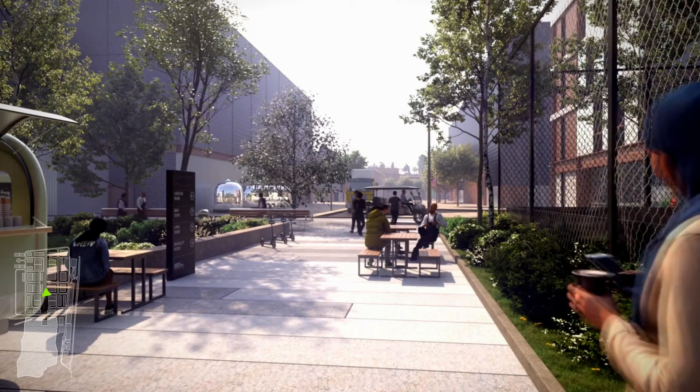My name's Rob Thompson, and I'm really looking forward to the next hour and hearing all about urban design and the film and television industry. And I think there's a couple of things that are really interesting, and I know that Bruce and Lucy will touch on this, but there's such a long legacy in the UK for the film and TV industry, with Ealing, and here am I showing my age, but Ealing and Nettlefold and Shepperton and Pinewood and all the rest of it, and it's so fantastic to see a new film studios being developed, so that's really thrilling.

And I think the other thing is that part of the whole thing about film and TV is it's such a visual and creative industry, and it seems really perverse in a way that they're housed in such drab locations. All the magic happens inside a shed, and it's like being stuck on an industrial estate.

Although I suspect they have better catering than a Rumble Tums van that runs around and beeps its horn at 12 o'clock, so everyone has to madly run out and get what's left of the sandwiches and the coffee.

So it's really thrilling to hear about how they're developing something in a new way, kind of like, well, why hasn't this been done before? So I'm really looking forward to the next hour, and I'm really delighted to have Bruce Calton and Lucy Fineberg from Scott Brownrigg here, who will do a much better job of introducing themselves in a little bit more detail.

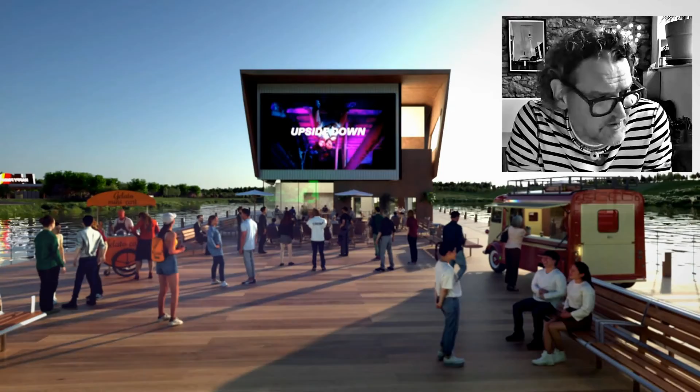Today we'll talk about a new breed of campus film studios and the approach that we have taken on a very unique, interesting and fun site. So today I'll introduce Lucy Fineberg, my senior urban designer, and myself, Bruce Calton, head of master planning at Scott Brownrigg, and we're going to give you a little bit of insight into the film and television industry and what it does across the globe, a little bit of history in the UK

in terms of where film came from and where it has generally been based in the UK, a bit of history about the site and how we trace through research the history of a site and what has happened in the past to what it informs in the future, and then show you how we've applied our research department work into analysing film studios to see how we've adapted it to the site.

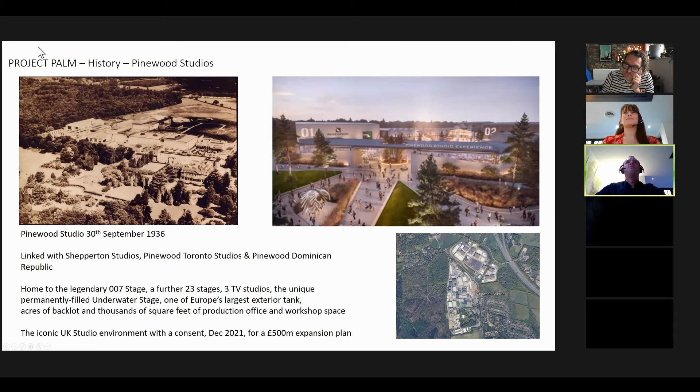And at Christmas last year, it received consent for a £500 million expansion, showing that the film and TV industry is a growth sector at the moment, and that's really because America is losing a little bit of its revenue, and it's going predominantly both to Canada and the UK, where stars are wanting to come across to Britain and be part of filming in the UK.

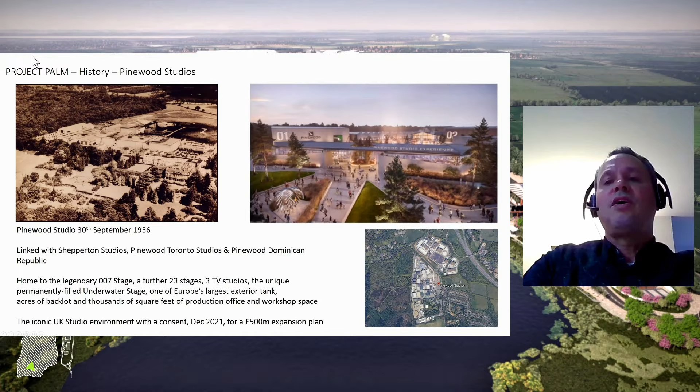Our discussion today is about how you go about master planning these. And in the bottom right-hand corner, you can see that Pinewood Studios grew from a series of sporadic shed studios, workshops placed relatively in a functional way that was just about growth, adding on a studio because they needed the space. Whereas we're hopefully today showing how to take that apart and re-look at how to design a new studio.

Elstree is a different type of product. It is a very urban or suburban location split over a series of sites. It requires a duplication of security, access, movement, parking, staff facilities, even though it's superbly successful, dating back to 1926. It is split by its location in a suburban West London location.

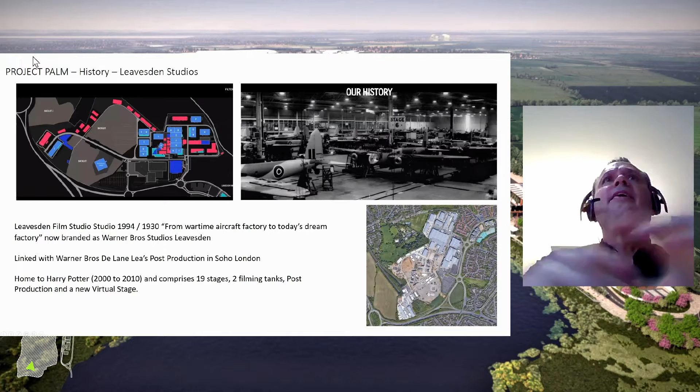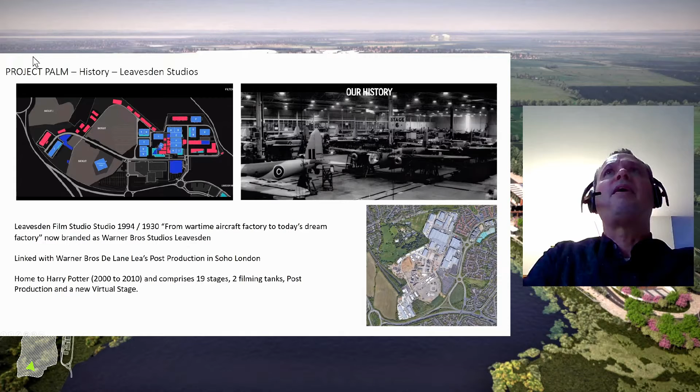And so places like Leavesden Studios up in Watford, originally a fantastic wartime aircraft factory, repurposed, as they say, to today's dream factory, taken over by Warner Brothers. It has a sister connection in Soho, London, for post-production units. And most people will know this particular film studio as the home of Harry Potter from 2000 to 2010, and it has some major stages built for visitor experience. Again, something interesting to think about when designing new film studios.

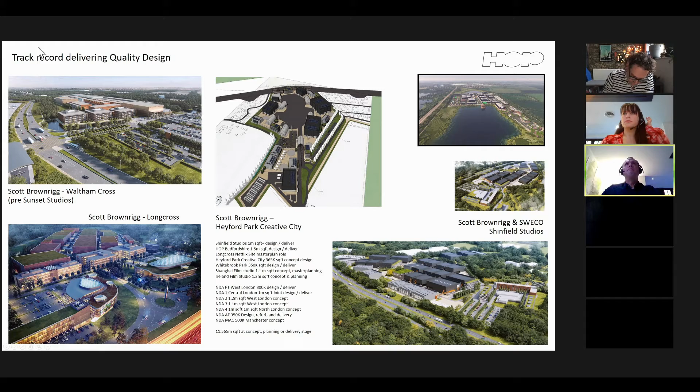There are many NDAs in place which are about other film studios coming forward, being designed, and that's really where we, Scott Brownrigg, have enjoyed the past 2 or 3 years, where we have captured part of this sector boom and buoyancy. We need in the UK to build 2.3 million square feet of stages in the next 3 to 5 years. That is what the agents in the industry have assessed is the capacity that we need to capture. So the moment is absolutely perfect to be looking at sites, bringing them forward.

And we've been lucky enough to work pre the Sunset Studios planning permission up in Waltham Cross, a fantastic site on the north part of the M25. We're currently working still on Longcross on the M3, where Netflix have a large facility, and we get called in to look at creative cities such as the American Air Force Base in Upper Heyford, just north of Oxford, to create a new creative city of film and media.

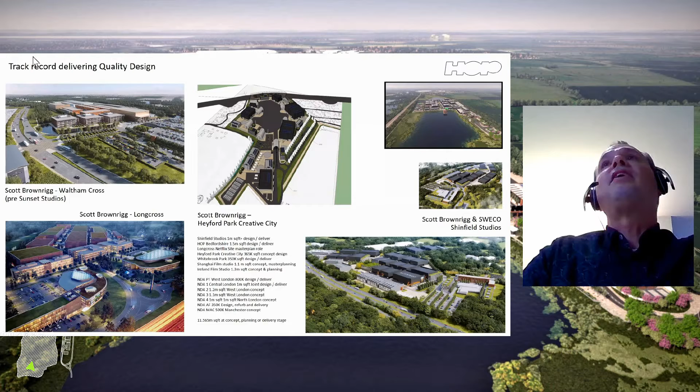We're delivering Shinfield on the M4 on land owned by the University of Reading, and that's interesting because the university have changed their course to give the industry graduates who can just come from the university into this facility, which is about 1 million square feet. And today we'll talk about HOP Bedford. So where do we start?

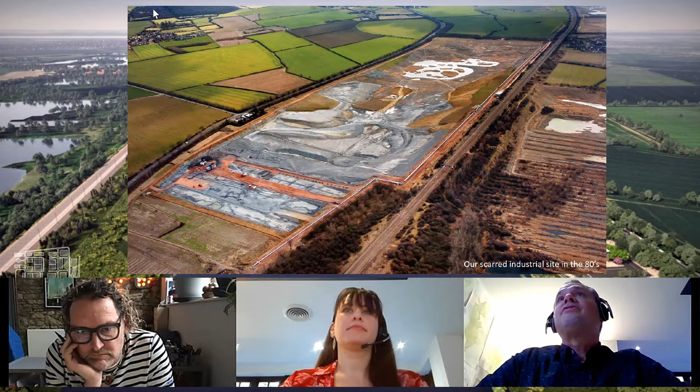Now, when we first went to site, this was the first photograph that we were presented with, which is a remarkable flat site just outside to the southwest of Bedford town. It's part of the past industry that scarred a lot of the landscape in the area, because London clay was found, and our site is a former clay pit that extends 20 meters down into the ground across this whole site. And what's interesting for us, Lucy and I and our master planning team, is to unravel history and understand how the sites came to be and what preceded our design input.

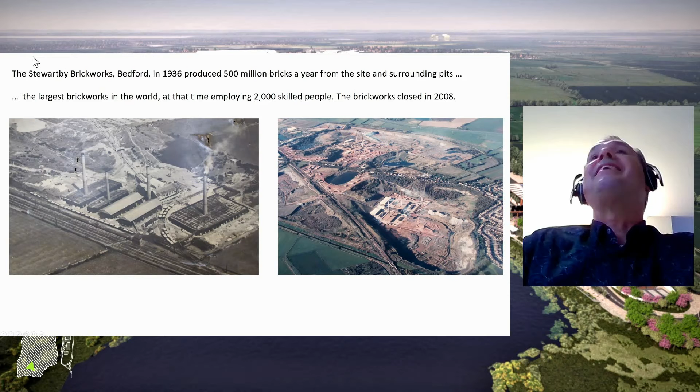And this was part of the Stewartby Brickworks in Bedford. In 1936, it was the largest brickworks in the world, producing over 500 million bricks a year from the site, the clay and the surrounding area, the clay pits, coming to a brickworks that Stewartby built and employed 2,000 skilled people at that time.

Today, it is a 143-acre contained site that has been filled with rainwater. It's not served by any river courses, and over the past 10-15 years, it's slowly filled up to about 6 meters deep of water, and reeds have grown in the surrounding areas, but the land sits 12 to 14 meters deep below the surrounding agricultural and residential communities that are coming forward.

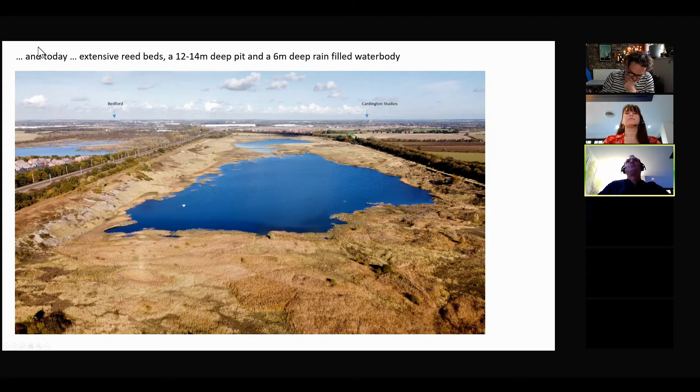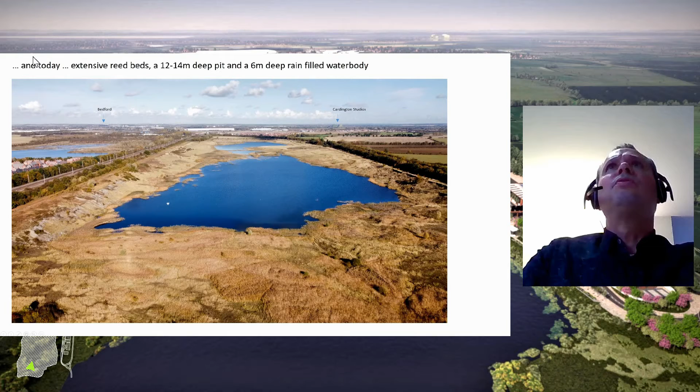You can see Bedford in the far left of the image, and interestingly, 1.5 miles away to the right, Cardington Studios, a former World War II blimp aircraft hangar. 2 hangars there have been converted to film and TV. And as we've got into the project, it's emerged there is a real population dedicated to serving the film and TV industry within Bedford themselves. And they've produced some remarkable global films you wouldn't know had come from the Bedford environment.

So before we unravel the onion skin of history around the site, this helps to illustrate how the site in the middle of the screen in red sits within Bedford's growth strategy. It's a southwest linear corridor following the railway lines, where Bedford have seen to develop a large amount of residential districts. Right next to our site, we have Wixams, which is coming forward in their latter phases, delivering 4,500 homes. Mill View, that sits right on the edge of our site, has just been submitted for planning with a country park

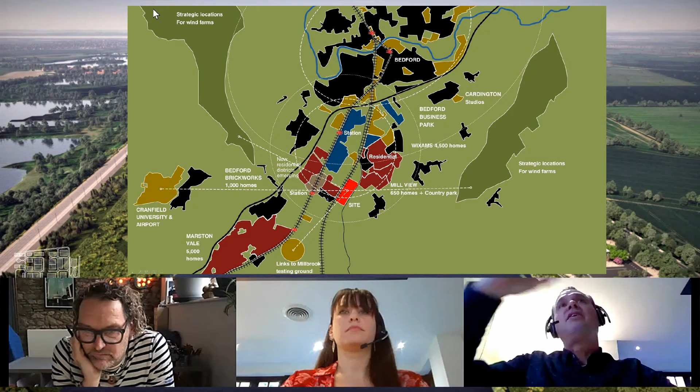and 650 homes. Within Stewartby itself, they've seen remarkable expansion of 1,000 homes in the village, and then the brickwork site will come forward as a further 1,000 homes, and Marston Vale, bookended by Millbrook Testing Ground and Cranfield University, is a further 5,000 homes. So we're lucky we're putting a high-skilled employment zone right in the middle of extensive new and existing residential, which supports our sustainable approach to connecting to these communities, connecting to the wider employment corridors to serve this particular site. So I'll pass over to Lucy to take us through our unravelling of history.

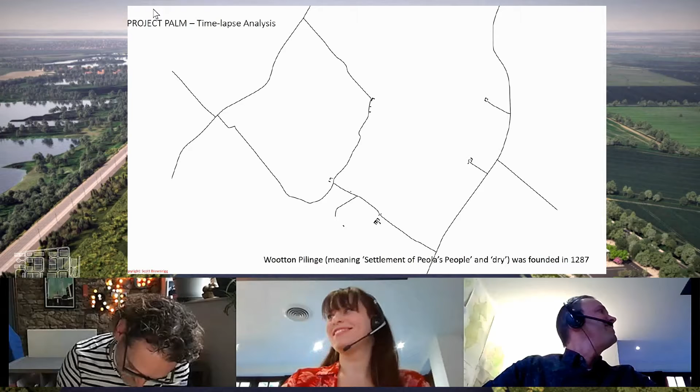Thank you. As Bruce has so well put, the way the site has developed, how much it has changed, that extends to the local village and how that has developed and is continuing to develop. The site was originally founded as Wootton Pilinge, which literally means Peola's people, and was founded in 1287. And then until 1846, it was a small hamlet of farms and cottages. And in that year, a railway was introduced, which dissected the village and basically increased the area's economic sphere of influence, and was the trigger for change. Following this, the Midland Railway Company built a second railway to the east of the village.

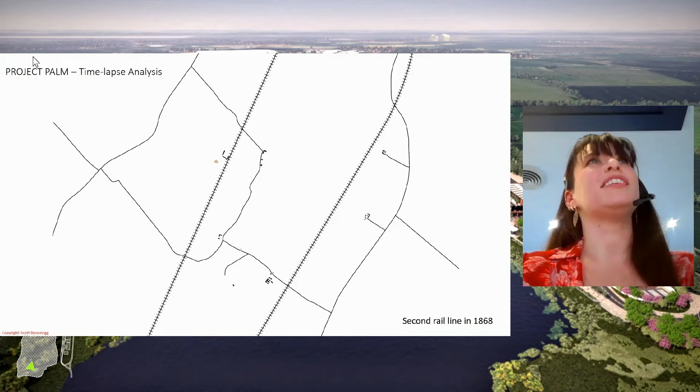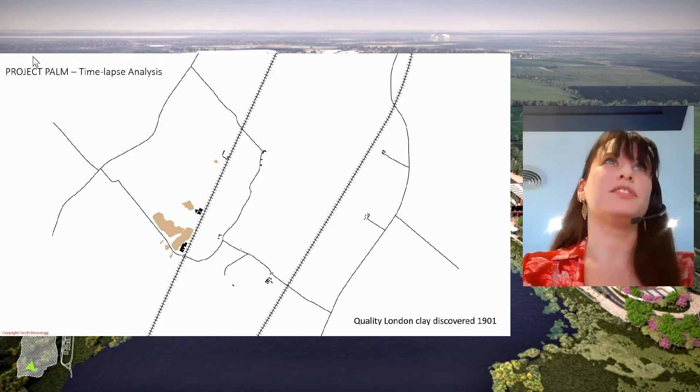And as Bruce has already explained about the clay extraction, at the end of the 19th century, the flat plains of Wootton Pilinge were identified as one of the largest Oxford clay exposures in the country. And this clay was used to produce Fletton bricks. And in 1897, brick revolution and a large increase in brick production took place, and massive changes in construction. In 1901, the Wootton Pilinge Brick Company was founded. And following this, in 1920, the London Brick Company and Wootton Pilinge Brick Company merged. Again, following this, a lot of change happened very, very quickly.

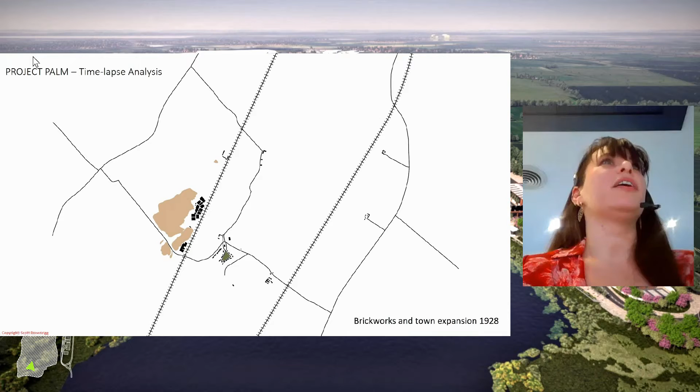In 1926, the Garden Village proposals for the village were submitted by the architect F.W.W. Walker. The village is renamed Stewartby after Sir Halley Stewart, who was the owner of Wootton Pilinge Brick Company. So it's very interesting how even the place is rooted in what is happening there. Churchill Close completed, and a memorial for the villagers who lost their lives in the First World War was built in 1928 to 29.

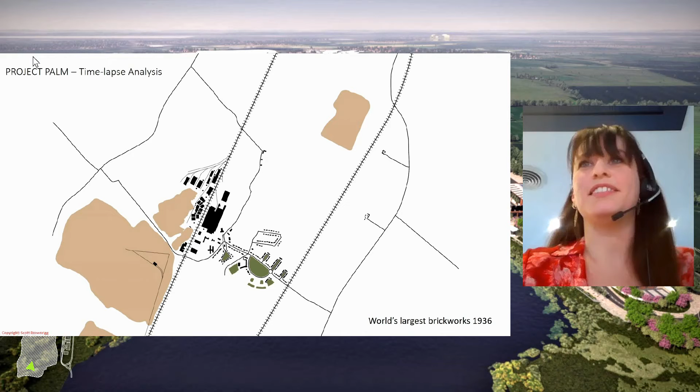Further development within the village was completed, and by 1936, as Bruce had already said, it was the largest brickworks in the world, employing 2,000 people and producing 500 million bricks per year, which is just an unprecedented scale for that time. And following this, as you can see in the imagery, more and more clay pits are opening up as the demand and the supply is increasing. But with this, in 1955, the Sir Malcolm Trust homes were built to house the retired brick workers.

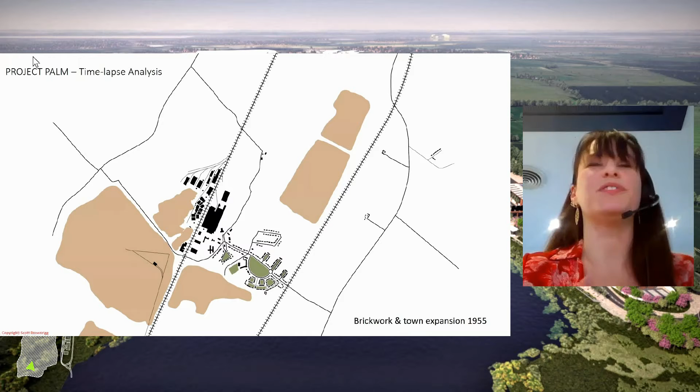In 1964, they built a school, so they're developing the village constantly. And in 1970, the Pilinge clay pit is transformed into a water body. So they stop extracting the clay, and it's now part of the Marston Vale Country Park. So it's going through a process of progression into different conditions.

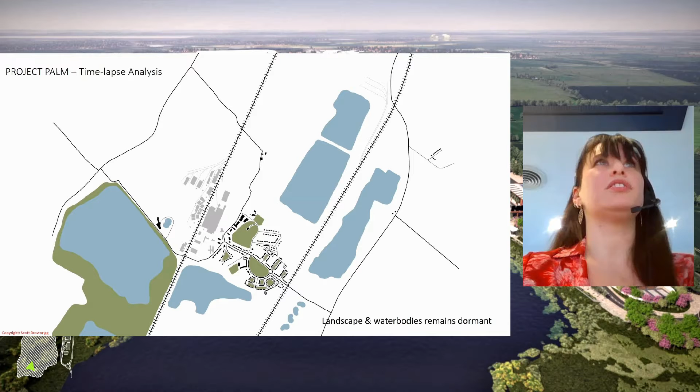Further development, so the Meadows housing estate and industry on Broadmead Road are built, and in 2008 the brickworks closed due to being unable to lower the sulfur dioxide emissions. And what we see is clay extraction pits have turned into lakes, and now we start to see further development, residential development, start to be developed.

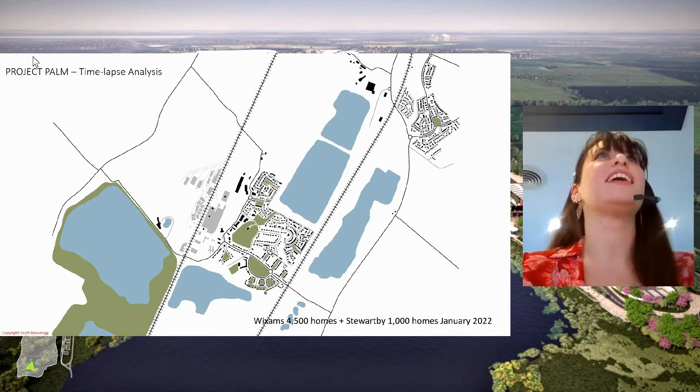And the latest is what we are starting to implement, which is the film and television studio campus. And what's interesting is how the scale, the nature, the industry is relating to that original Stewartby character, and it forms that cornerstone for the surrounding developments and skilled employment for future residents of the local area.

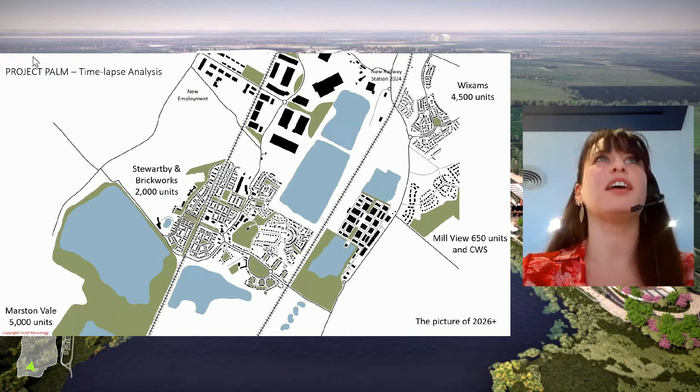Excellent, well done. And I think it's really interesting, the philanthropic approach that Stewart did in terms of looking after his workforce, looking after them once they'd retired. He built the churches, the stores, the schools, the senior living enclave within Stewartby itself. It's really nice, and when you drive through it, it has that.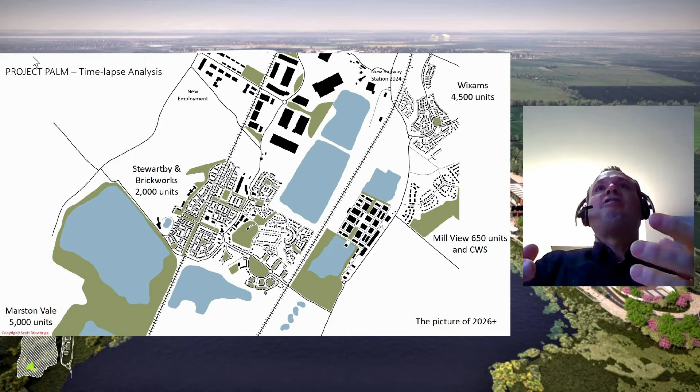It's not quite Bournville up in Birmingham, but it's got that feeling that somebody looked after the brick, and it is of its geology, because the brick that came out of the ground is what they built the whole of the village with. So it's really fascinating unraveling that history and looking forward. So that was then, and here is the future. So I'm going to start with a very busy page now.

When our client, who is Verb, part of the Yondr Group, and Quartermaster Entertainment Industries, who are the operators of the film studio, approached us, rather than just diving in and drawing and thinking that we could design a film studio from scratch, we stopped and we looked at all of the existing film studios that had been built and all of the current contemporary studios that are going through the planning applications and with planning permissions, to try to decipher what are the core ingredients that make, if you had a clean sheet of paper, a highly functional film studio with all of the supporting infrastructure that you would need.

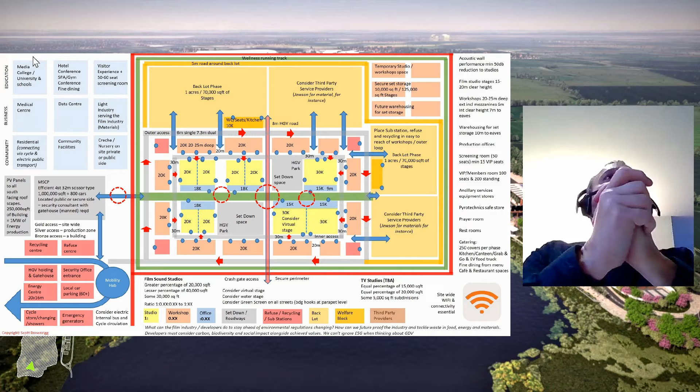So if you're building in the middle of a desert, what would you provide so that you could operate this particular sector? And what we did was the research team looked at all of the information and collated a document. This is a page from the document of what the core ingredients of film studios should rely on. Up in the top left, it's the ideal mix and link to support infrastructure.

Within 10 minutes of going live on our emails, the University of Bedfordshire contacted Quartermaster to say that they really were delighted to hear a film studio was occurring within Bedford itself. It means that the students leaving the university don't travel to London to go to Pinewood or into central London film studios. They have a facility that they can come to and work at on their doorstep. So the links, film studios with links with colleges and universities, and now at schools as well, is vital.

What we find is missing in some of the studios is hotel or accommodation for staff. A lot of the poor press that you read about film studios is workshops where staff work very, very long hours and perhaps leave late at night or early morning, very tired. Accidents are happening. So our client has taken the view that we provide accommodation on site for people that, should they wish to stay, they can do, because the health and well-being aspects of this film studio have been ingrained in the design from day one.

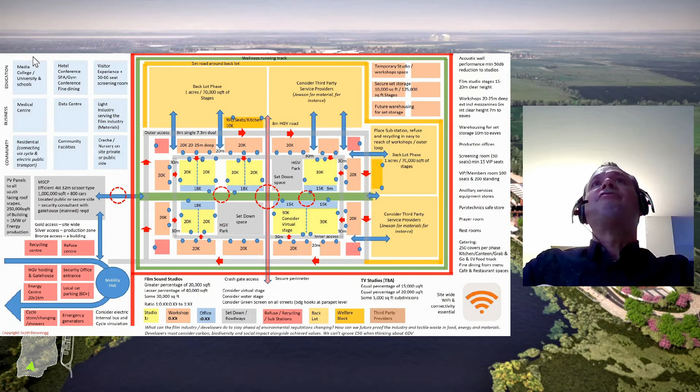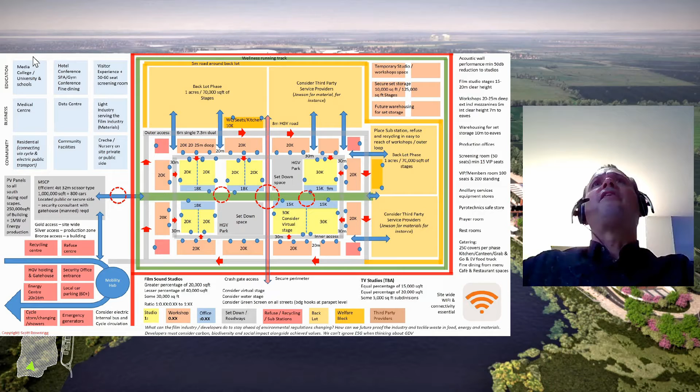We wanted to do things differently from the more ad hoc older film studios and provide facilities that you don't find universally elsewhere. We also have to think about the visitors and the local community. We have to say we have been really surprised and really delighted that we've had 89% positive public consultation support, writing to the council or writing onto the website saying that they're delighted to see this high-skilled employment space occur within such a large area of residential. Mostly they were citing there's nothing much else to do, so this was something of real interest that the community could engage with.

So we've looked at including visitor experience within the site, and within the businesses there are lots of support facilities that actually get built to support the economy and the function of a film studio. Medical centres, data centres, light industry serving the film industry, providing materials and support will happen in the surrounding areas. And the community themselves, how do we connect with them? Can we provide things that enhance their life?

We're providing a new electric bus service connecting the 4 railway stations together through our site, so that it's sustainable, electric, covered, and connected to the communities. Hopefully we can then have people coming from their homes via electric bus to the site. And at Scott Brownrigg, we really stand for wanting to drive a sustainable agenda across these sites.

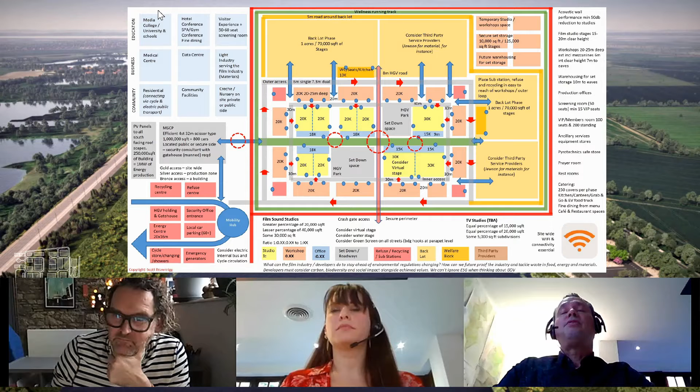This and the master plan has been sent to the Americans, where they've commented they just can't do this type of approach. This has been seen as radical and an ideal that they would love to do. But with unions, they look to have all the workshops in one location 5 kilometers away from all the stages, which might be downtown, and therefore there's huge transport costs moving sets from one side to another. We've looked at combining all of that into a very functional layout applied to the particular site.

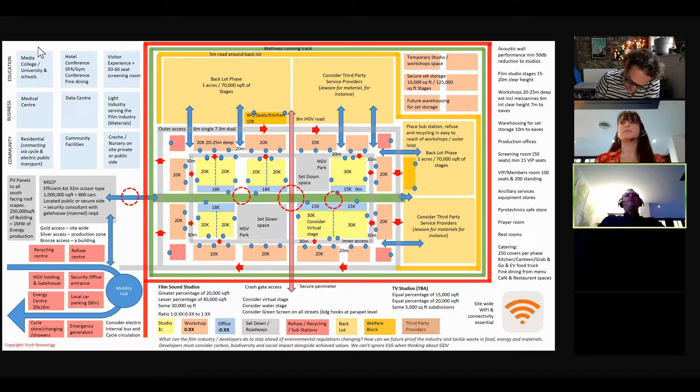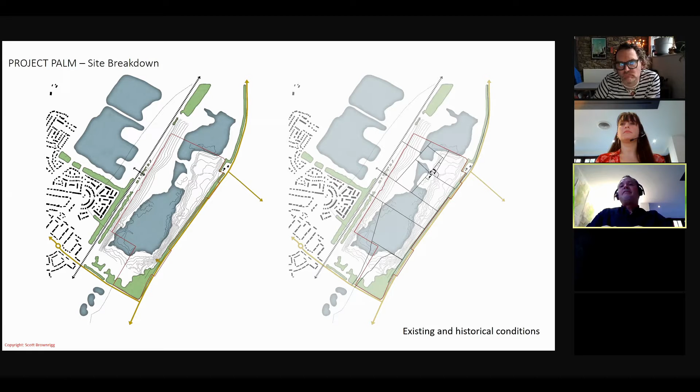So how did we go about doing that? What's really interesting is, you walk on site and you've seen the photograph of this water body within the reed bed environment. As Lucy explained, if you go back in history and unravel what happens on site, the right-hand image shows the original farm, Brook Farm, sitting in the middle of the site, and its field boundaries. That gave us the point where we felt that it gave us the centre of activity. It looks back at the history of where activity on the farmland used to occur, and could that influence our thoughts

on the design. So we applied the design principle to the site, and then started to look at the technical aspects. We have to fill the middle of the site. The reason why we chose it, not just because of historical links to Brook Farm, but also it was the shallowest and most connected piece across the water body. We can take the soil from the site to make a platform level within it, but we do have a legal responsibility to maintain the water level of the northern lake at the top of the page, because that isn't owned by our client. So that is set at 26 AOD, and we're not allowed to let that fluctuate.

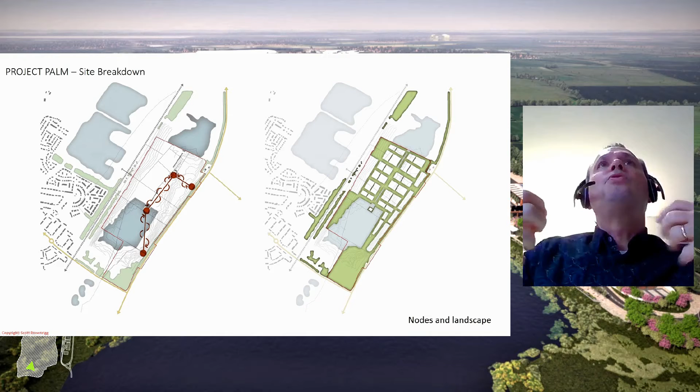We have to absorb it through what began as a very technical and functional drainage ditch which connected two lakes together to drain the water back into our water body if the third party one rose or fell. What's interesting is that pure technical drainage ditch has now evolved into something very, very unique for the site. Again, unraveling history, there were two access points off of the main road into the site. That gave us a point of creating a node, access and entrance to the site, connecting to Brook Farm's original centerpiece for the site.

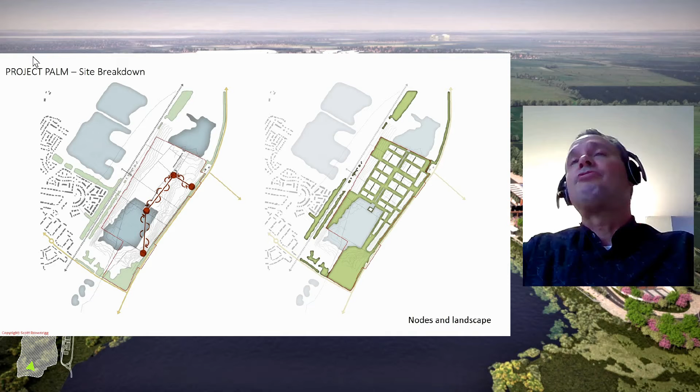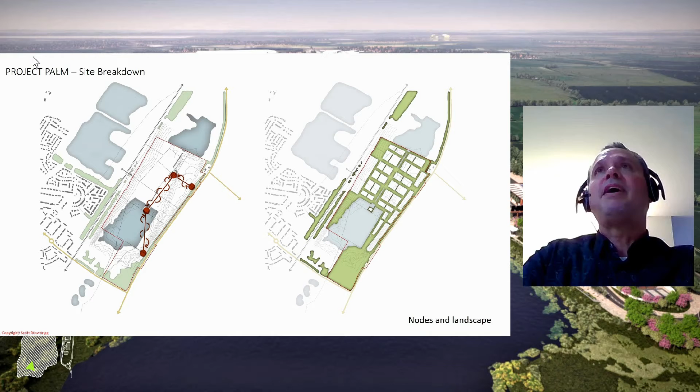And we've been very keen, since the client purchased the site in 2016, part of it has been designated a county wildlife site. So we have to be super sensitive about how we address the site. Most of the 143 acres we're not going to be touching. We're not touching the lakes and the major reed beds. We're filling in the central part of that water body to create a platform. And we're looking at how we enhance reed beds.

We're creating 40-metre strips of floating reed bed to create a different ecology within the southern lake, and keeping all development in the area where we're creating an urban grain of buildings on a grid and functional level. And those allow us to have a phased approach where we have 4 production units. So you could have Netflix or Disney filming on site at any one time with 4 production areas, whereas most of them are quite secretive and fenced off.

With the use of the watercourse running through the site, this becomes, in the later pictures I'll show, a really valuable spine and a bioswale, which is uniting the production units and the staff and the visitors all together.

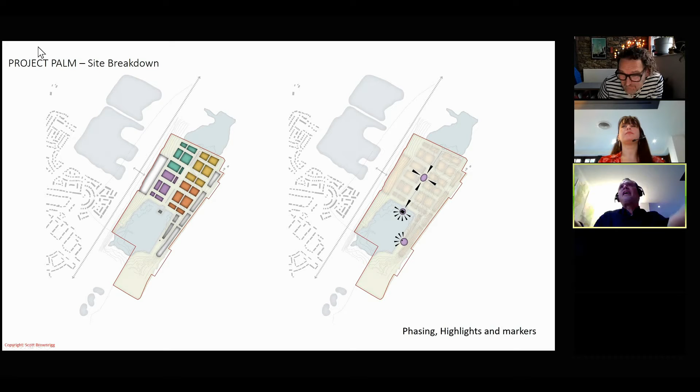And it creates quite a formal avenue through the site, connecting with a VIP building that is the only building that we sit out into the lake, so that people can experience the lakeside setting, the uniqueness of this buried film studios 15 meters down into the valley base, and relatively hidden from the surrounding areas.

So taking our design guide, what we did originally on the left-hand drawing was create an outer perimeter for all the vehicles that come to site that serve a film studio. There's a lot of HGVs and rigid vehicles full of scene sets, costumes, paint equipment, props, lighting, and it needs to come into the site, but not, in our view, conflict with staff and internal movement.

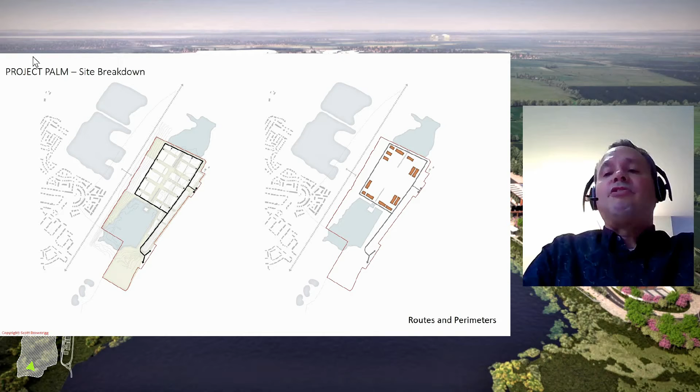So we created an outer loop road that serves the 4 quarters, and stopping points on that outer loop road then allow goods to be taken off and put into a perimeter of workshops shown on the right hand diagram. Placing those on an outer edge almost creates a defensible boundary around the inner part of the site.

We have to obviously create a network of internal streets, and they have dual function, not just for vehicles or material movement, but also you can line those streets with green screens, and you can suddenly transform a street into a Venice waterway through the magic of the film and TV industry. So we've been very careful to allow streets to be multifunctional, not just traffic and pedestrians.

And in the way that we've considered the site, on the right hand diagram, we've concentrated the tall single mass studios, which are about 24 meters tall, 75 meters long, 40 meters wide, into the center of the site. The green ones are specialist stages such as virtual stages or water stages. The purple ones are generally about 40,000 square foot stages split into 2, because that's what the UK market requires.

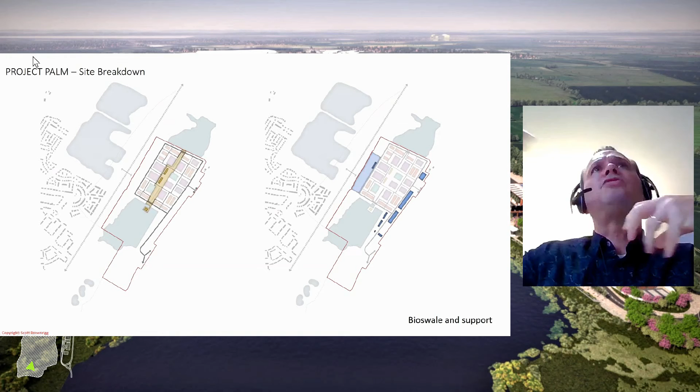And so there's quite a hierarchy to the design: outer loop road, perimeter workshops, inner cluster of stages, but then using the connecting water feature, looking at how we create a bioswale with a multifunctional external use that supports the health and well-being of the site, something which isn't being developed in existing film studios.

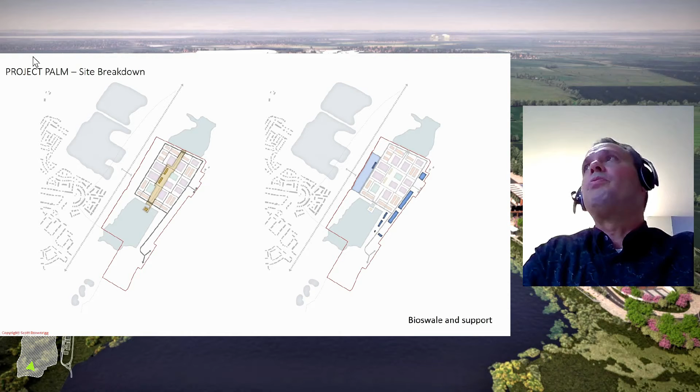And we also have to have support facilities, the accommodation, the backlots, stage supports, admin offices that we've placed just outside of that functional centerpiece. And the community on the left-hand side are provided with the transport hub and a healthcare block. So on the first floor is health, ground floor, an enclosed real-time transport connection, which connects to electric bikes, electric car charging, as well as the electric buses that then connect out to the railway stations in the wider community.

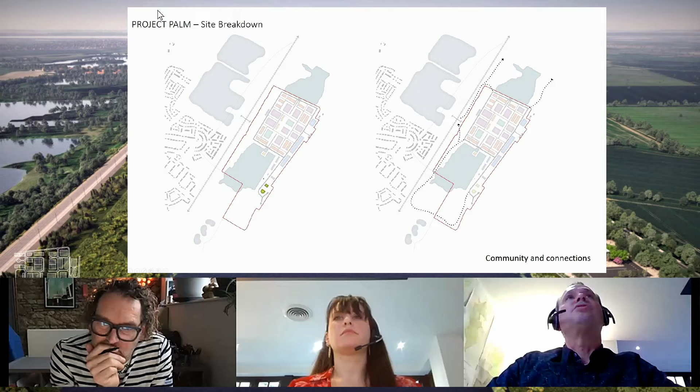And thinking about trying to create a connection for the trim trails within the site and within the landscape of the site itself, connecting with the county wildlife sites that are being provided by the residential schemes of Millview alongside us, so that we're looking to allow the staff and the workforce to be able to access better health and well-being facilities than we would normally see.

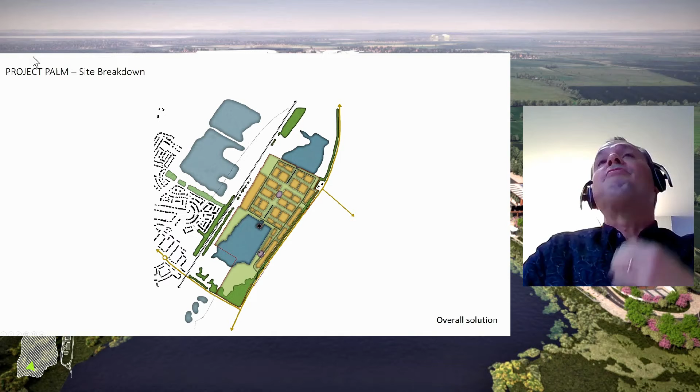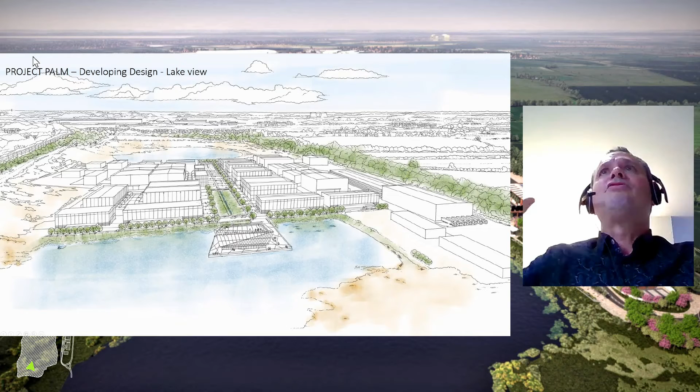We bring that all together at a design freeze. We started the project in October. By December, we needed to be at a design frozen layout to be able to then move from January through to just about 6 weeks ago when we submitted for planning. And we did it by doing some initial early sketches to try to convey to our client and the community the scale of this, and the fact that actually it's very sensitive.

In the backdrop of the image here, on the left, there are some very large logistics and distribution buildings that are white and grey, and they stand out in the flat landscape of Bedford quite significantly, whereas we are sitting down 14-15 meters into the site below the surrounding tree line. And we started to initially look at what the bioswale could be, try to move it from a very technical ditch, as it was called, into something which is really creative in the centre.

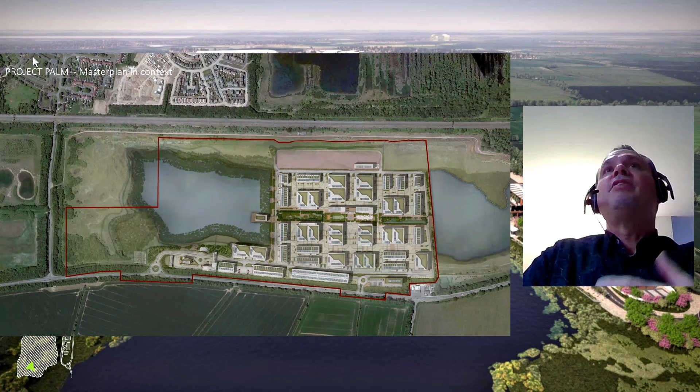And then Lucy's work in envisioning the illustration of the master plan and how it sits within the site and how it builds up from the main entrance through to the loop road. We've kept very true to the original design work that we did with the research at the beginning.

And the central bioswale has become a fantastic feature that everybody has bought into, the council, the community, the client and the team. It includes restaurants, cafes. It now includes internal gyms, external sports, recreation, farmers markets. It's allowing for the famous silver Airstream caravans to sit alongside the bioswale, so the stars who come to site can stay in the Airstreams and then step out into this bioswale corridor that connects the north to south lake.

We wanted to make sure visually we could connect both ends of the site together, and the feature of the VIP cinema that has indoor and outdoor cinema, bar and restaurant sitting on the lake becomes the gem at the end of this internal vista.

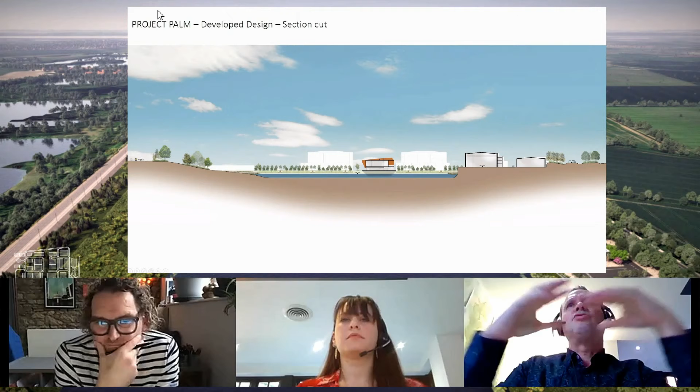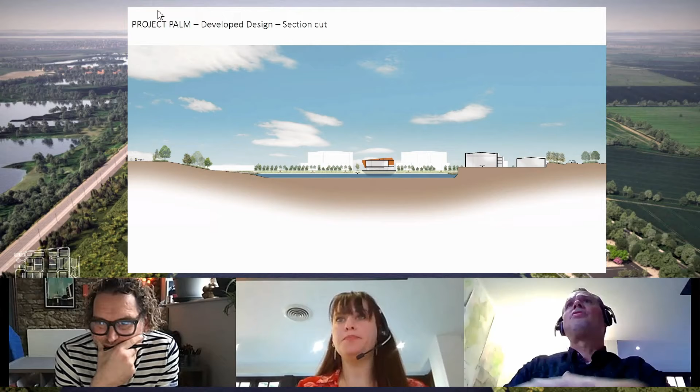And to help convey this to the community, we did a series of high-level sections just to help them visualize these mass of stages and workshops sitting within the basin. The railway to the left is at 40, our platform level is at around 30, and the roads to the right are at 37, but the tree boundaries are 15 meters tall. So we know from the LVIA work that we did at the beginning that you won't see the development from the surrounding agricultural and arable fields.

It's amazing because they are big buildings at 24 meters tall for the major stages, that they can be so light touch in the context of the surrounding area. We have to prove everything works. In terms of the top left, the external bus comes to the front of the site. They are secure sites. You have to go through a careful controlled system so that the general public can't just wander into the film sets.

But then when you get off your electric bus, there's an electric shuttle bus, electric bike, electric scooters at the front door of this site, because the site is 500 meters wide. In total it's a 3-kilometer circuit around the site. So you have to think about how people move across such a large area. So an internal bus and electric movement has been allowed for.

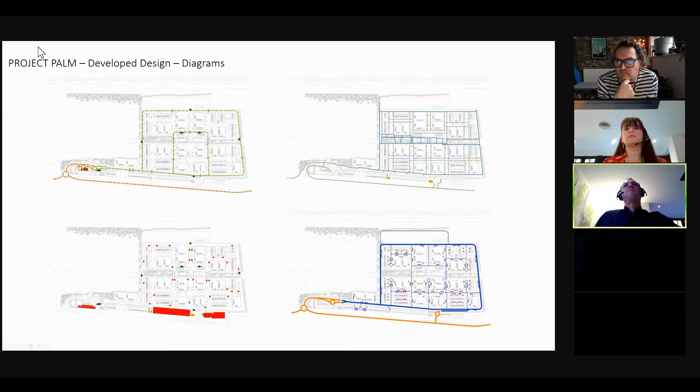But we also have to be very inclusive of our design. We recognise that whilst we provide 1,000 cars to the multi-storey car park, those that are ambulant disabled need to be able to park next to their place of work. The workshops and the stages all provide disabled parking and secure cycle parking to every single building.

And then functionally, the bottom right hand image is how we deal with the service vehicle movements. Every stage needs 2 access elephant doors, one on the short side, one on the long side, served by rigid vehicles or HGV. So technically, as master planners, we've worked really hard to create a grid and a framework that is very different to what you'll get in certain other new film studios.

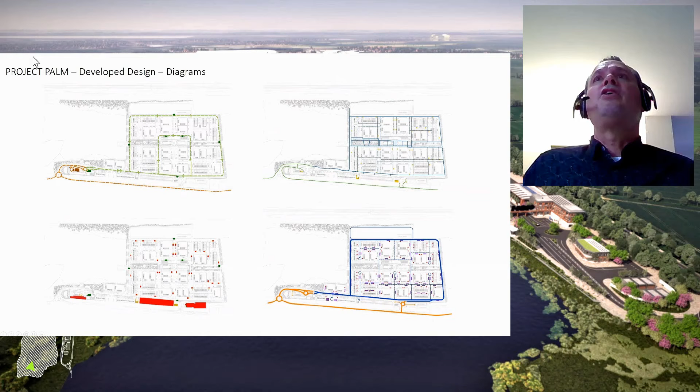We've very carefully had to think about how vehicles move so they don't conflict with people, and we've had to have long discussions with the client about providing more space, more elbow room within the film studio than you would see in other new film studios, which are quite a lot tighter and rely on T-junction turning heads rather than the banjo turning heads, which are a lot safer and more maneuverable within the site. So we're very pleased we've pushed the boundaries of looking after the staff in these areas by providing safe and wide corridors.

And we have to show functionally how it all works sustainably. All the buildings have 50% PV panels across all the surface of every building. The remaining 50% is green or brown roofs. That helps capture the rainwater. The rainwater is then captured into large tanks in the ground. That helps water the extensive landscaping that we're providing. The hard surfacing between the stages all go to channels. Those all get drained to the bioswale. So there's a lot of water mitigation across the site and water capture for the site.

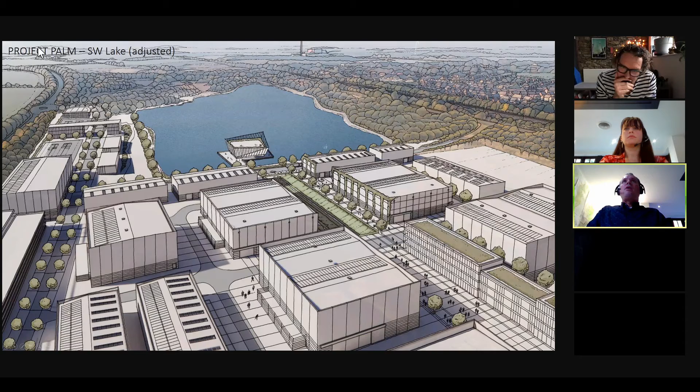Both are highly functional, but what we believe has set this apart from other sites and other film studios is one which focuses a lot on the health and well-being of the site and of those facilities. So as we come to the end of this, we've got a short 1.5 minute film that we're going to struggle, but we will try to show.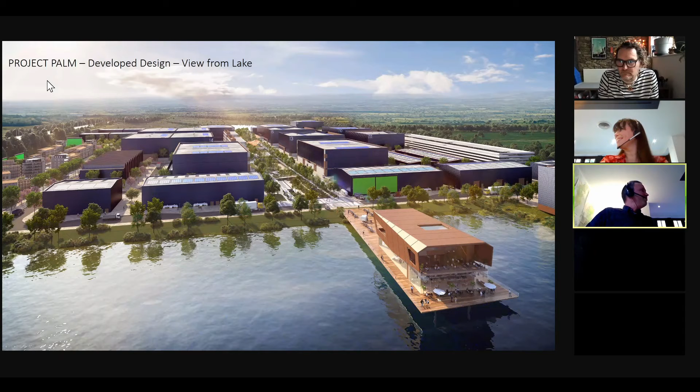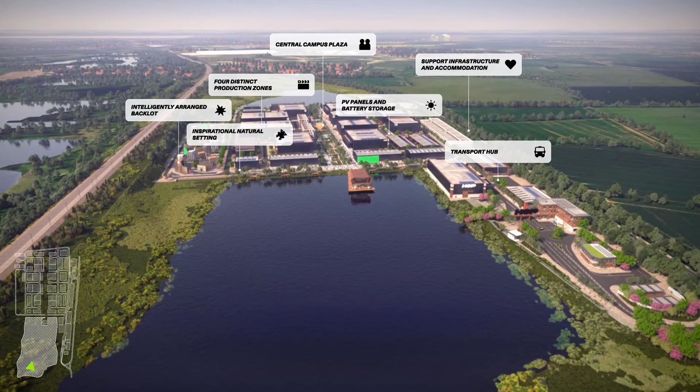Now, am I showing that? I'm going to share, if you don't mind. I've got to just cancel out and find it. It has. Can you see? Yes. Can you see it? Okay. It may play with music. It may not. Can you hear music? You can't. No, sadly not.

But I'll take you through across the lake to our VIP building, sitting in the lake with restaurants and bars, through to the bioswale where it terraces down for the staff to actually access and use, something very unique in this industry, to the centre of the site where we have the restaurants, bars, cafes, outdoor play space. We've got basketball courts, table tennis, five-a-side football, a gym, lots and lots of outdoor tented areas where people can sit.

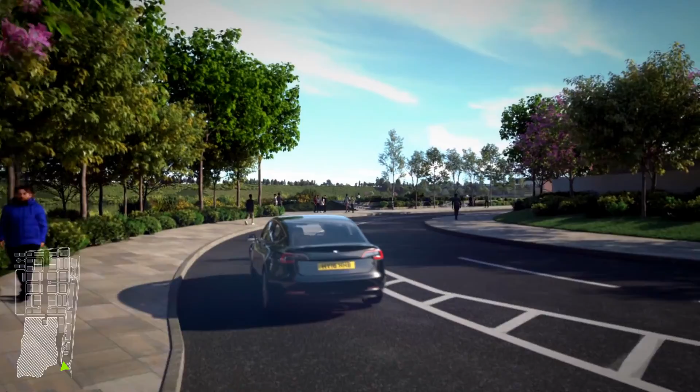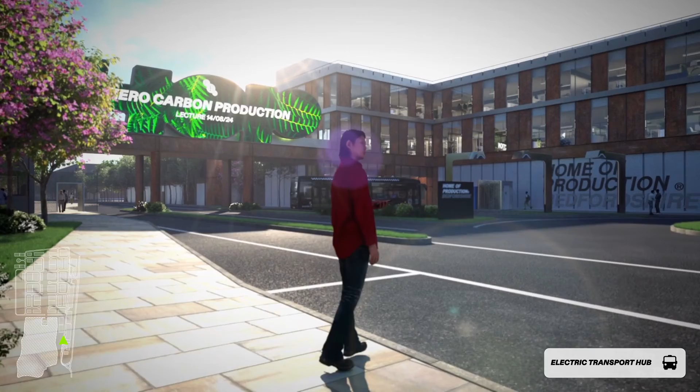Coming in through the entrance, very careful landscaping that allows you to have that open view across the lake and into the production unit. Coming up past on the right to the transport hub and then to the main gates, which is the admin office that controls and operates the whole of the site, at the front door, and then we come through to the back lot.

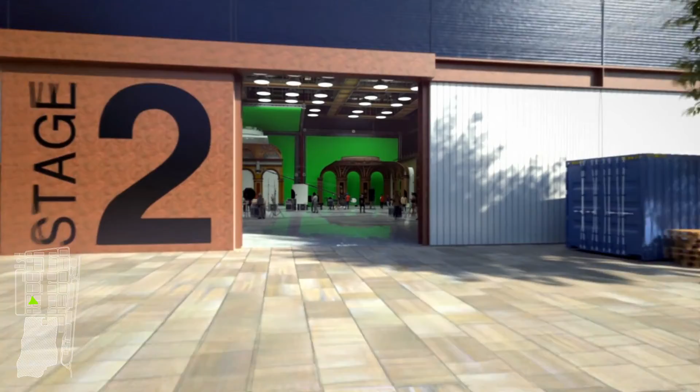It could be a piece of New York, as it is in this scheme, going through the workshops on the outer perimeter of the master plan, where it's all constructed, painting, costumes, equipment done, then through to one of the large 20,000 square foot stages where they build and film, through to the single surface public realm environment,

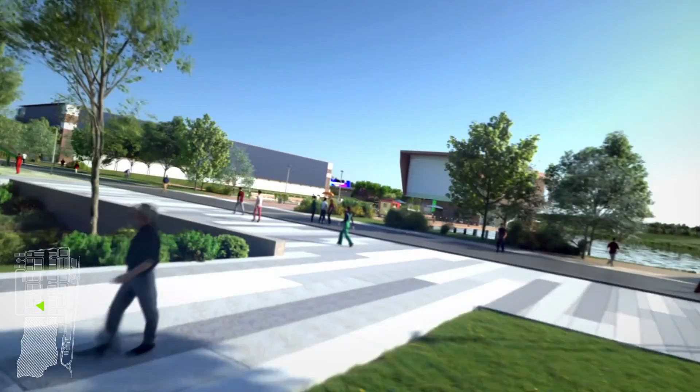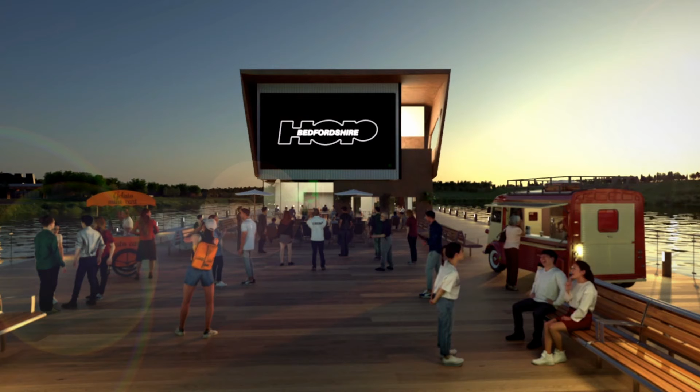and then concluding as you step out into the lake to the VIP cinema that is open to the public occasionally throughout the year as a facility for people to come and see previews of films, what they have been shooting during the day. We will show outdoor sports events on the outdoor cinemas and the like.

So we have just come up to 45 minutes, and I think that just then takes us through to the very last slide. Sorry, I apologize.

One of the unique features of the site is that we've got a 1 kilometre perimeter of workshops. And what we've proposed to the client is this will be the first 1 kilometre graffiti wall around the whole of the site. We're going to engage with universities, colleges and commercial artists to provide fixed graphics which are film and TV inspired, but also panels on the walls which can change.

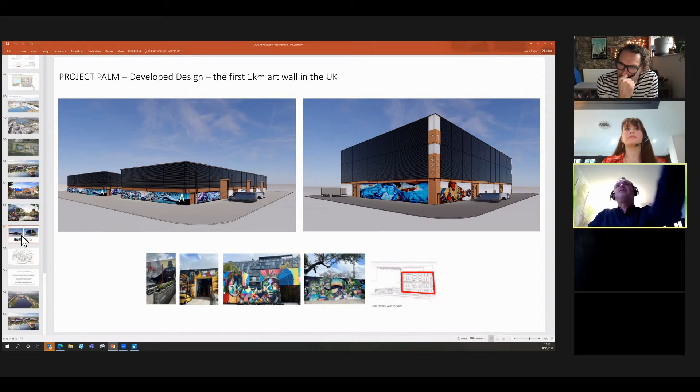So if Marvel turns up, the base 3 meters of each of the buildings can then change to suit a Marvel graphic or Marvel imagery, something that the client was so engaged with, he went to Miami to take photographs as shown on the bottom image of what it could look like.

And we've also from there taken a very detailed look at how to change the way film studios are designed and how they can be more sustainable as we drive for net zero carbon in any of the developments that we try to do. So we're promoting timber construction for the offices, off-site manufacture for the panels for the stages, looking at ways to capture and heat and cool the buildings.

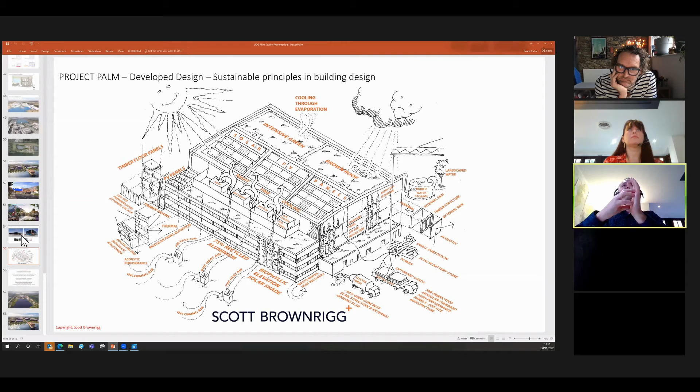We're saying, because the industry only uses halogen lighting elsewhere, that all the lighting on site will be LED. That dramatically reduces the energy requirement on the site, but also HOP Bedford will burn no fossil fuels in operation at all. So that's something the client has driven as well.

So we're really pleased to have been able to evaluate history and look back at how film studios were designed, how film studios are currently coming through planning, what would be the things that we would learn. And we've really pushed health and well-being for all staff across the site, creating real public realm that's not seen in the older film studios in the UK,

focus on providing very central cafes, restaurants, gyms and access to Country Park and all around the new bioswale, introducing orchards, farmers markets, increasing the reed bed to help balance the net biodiversity, accommodation to support those on the site who are staying late. It's a functional layout, but it's got fun designed in. All the routes inside can be film sets as well.

The client is signing up to looking after and managing the country wildlife site on site for the next 30 years plus. We won't burn fossil fuels on site in operation. We're generating the power from solar and battery storage and air source heat pumps for half of the need of the site. We would love to do the whole lot, and there are a couple of film studios that are proposing 100% PV power serving their sites, and we commend that.

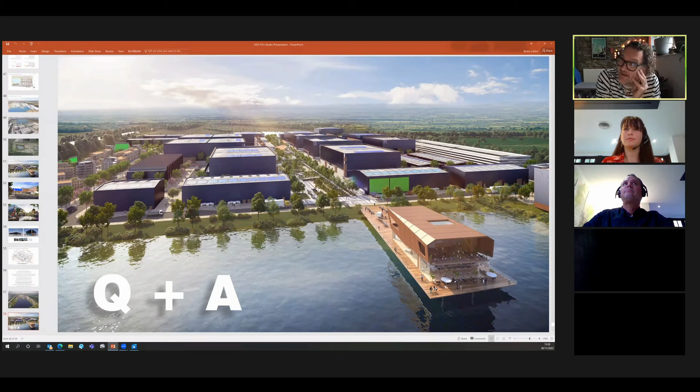And I think it's the reason, when we were talking about it before this presentation, and I alluded to it at the beginning, that this is something different. It feels much more like an innovation district, and that spine being something that people can enjoy and meet and share thoughts and be inspired, and you get that cross-fertilization of ideas and discussions. It's not all separate buildings, everything separated by palisade fencing and all the rest of it.

And I think the council and Bedford have been absolutely fantastic. Their initial impression was it's going to be like a big logistics and distribution park with 4 people in there and a load of robots on packing crates, and a very sterile concrete environment. And we've really tried to create a landscape-led environment. We've worked with McFarlane Associates, who've done a fantastic job reinterpreting what would normally be done on a film studio into something which is a lot more green, a lot more landscape led.

Yeah. Well, and you can say, well, it could be robots. It depends on the film, doesn't it? True. Yes. I mean, Guillermo's going to be busy. I notice he's getting loads of text messages from everybody on the film.

But one thing, if I may ask a question, I don't know whether anyone else on the call has questions, but one from me just to start. You talked about the planning authority and taking people on that journey, and I thought it was quite intriguing, the idea of what the unions wanted, that whole idea of separation, we want stuff 5 miles away, this is the way we've always done things, and goodness knows we know that in other fields of urban design at the moment. I can't quite work out why they want things 5 miles away, but how did you tackle those ingrained assumptions and demands? I'm sure the compelling images have been part of it, but have you had any stumbling blocks in that?